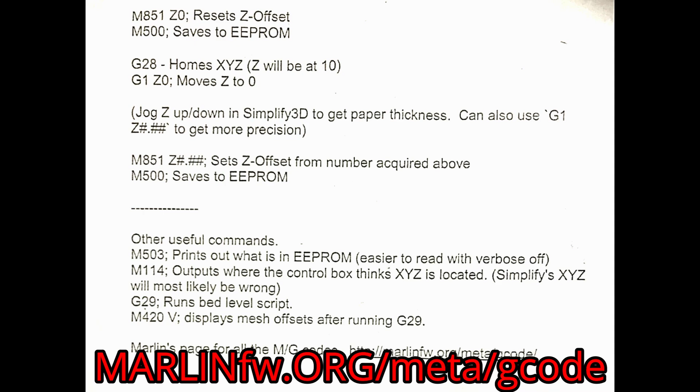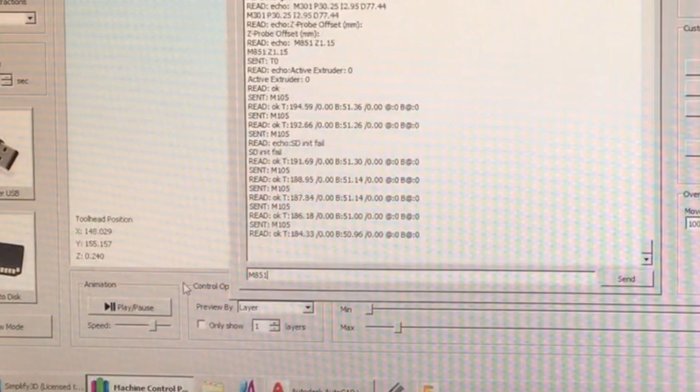We're going to start out by turning on your heaters, and we're going to reset your 0 position. And we'll do that with an M851 Z0 command. And the M500 saves that command. If you look above in the script, you'll see the script keeps changing about every second or so. I have the verbose box checked.

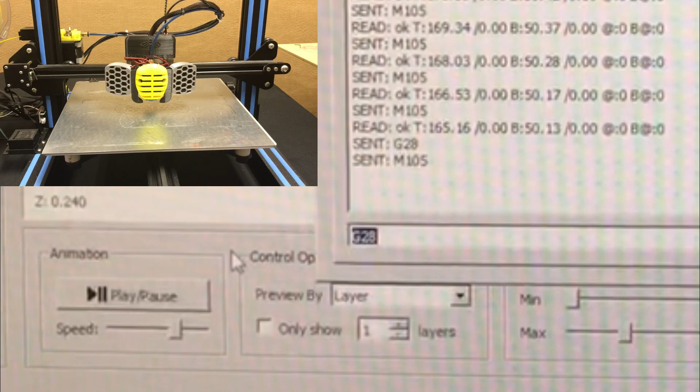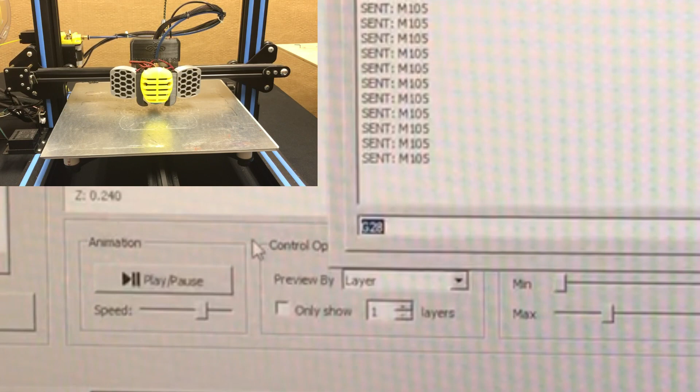We're giving it the G28. As you'll see in the picture, this is going on in real time. That is a command for your printer to home itself. The other commands, as you can see, that are sent up here, I believe that's Marlin requesting a temperature reading. So if you have that sheet and follow along, you'll understand what these G codes mean. Makes it a little bit more clear now.

A lot of guys out there have this already down. I don't want to talk down to you. This is for people trying to set their Stinger up. So kind of bear with me on this. I've only been into this for a couple of years myself and not a real G code guy.

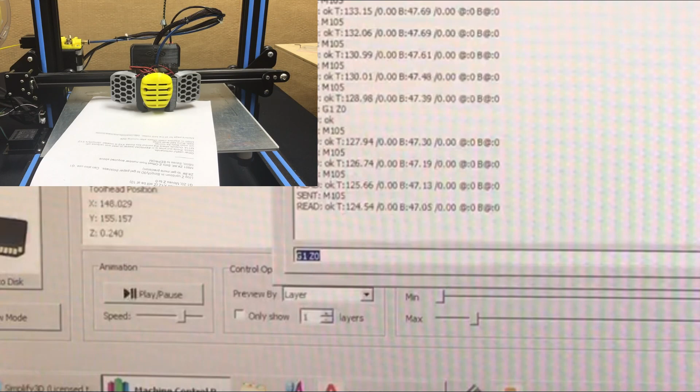We're going to use a piece of paper as a gauge, as you would. And we're giving it the G1 Z0, and that is basically taking it down to the 0 where it touched off. Now if you look above up here, you'll see my pointer right underneath the Stinger picture, and I hit that 1 millimeter up on the jog twice. So we're up 2 millimeters, which is above where the paper is gauging it.

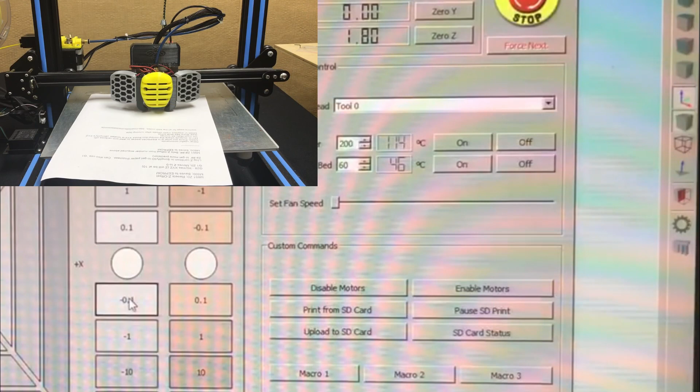Now if you look down below, you'll see I'm going down 1/10 of a millimeter at a time. I keep doing that until I feel a little tug on the paper. You see me decreasing 1/10 of a millimeter. I'm at 1.2 and 1.1 millimeters. Now I have to really tug on that paper. It seems like it's a little tight.

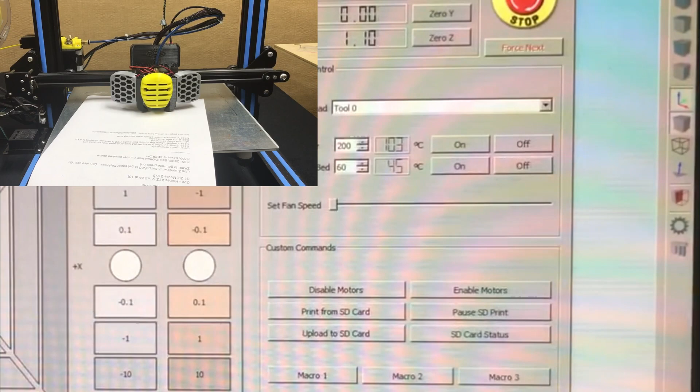So when we set our distance or our offset in here, I'm going to give it a little extra. This is a way that, if it's a little tight, you can kind of gauge it. I've done this quite a few times, so I'm doing this from experience. So I'm going to go about halfway in between. I'm going to do the M851 Z1.15. That's halfway between 1.1 and 1.2. Now you'll see me set it with M500. That sets it into the EEPROM's memory in the firmware. So now we should be all set, ready to go.

We're turning on the temperature again. I let it get away from me. Should always do this with it at least 150 degrees extruder temperature and at least 50 degrees bed temperature. So we're just going to wait. I'm doing this in real time so you get a feel for how long it takes to do this. It's a pretty simple thing.

You're tethering this to your computer. I have several machines and they're not near my computer, so it's kind of a hassle for me to take the machine into another room and tether it to that computer. Time to get a laptop.

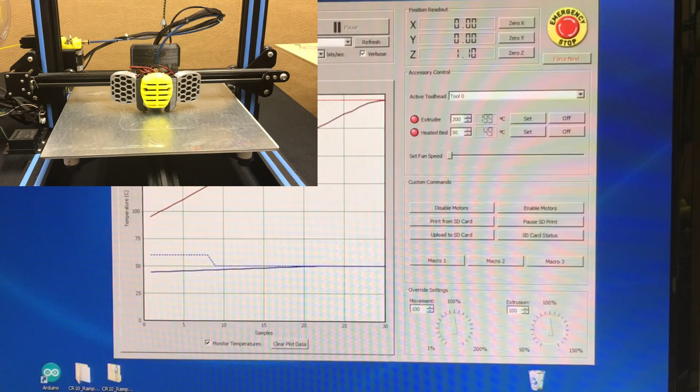You can see that heater has a nice straight graph line. Another thing to mention while we're waiting here, I'm going to do another video, or I should have one in the can soon, of the M303, which if you have your Marlin paper there, that is the PID calibration. So we're going to let this heat up, and what you'll want to see if your PID is calibrated, or your hot end, thermistor and heater, is a straight line once it gets up to its set temperature. You can also see that on your verbose feedback, on your communication screen.

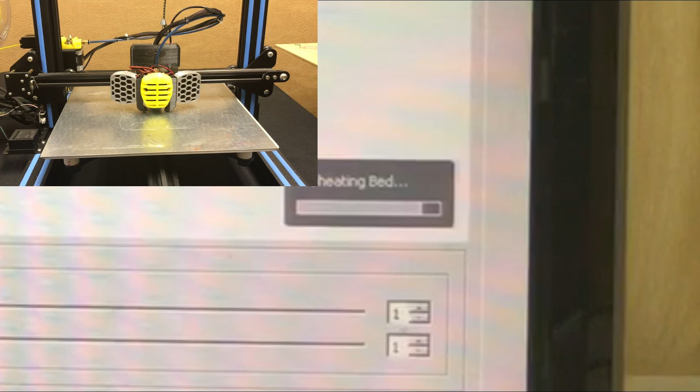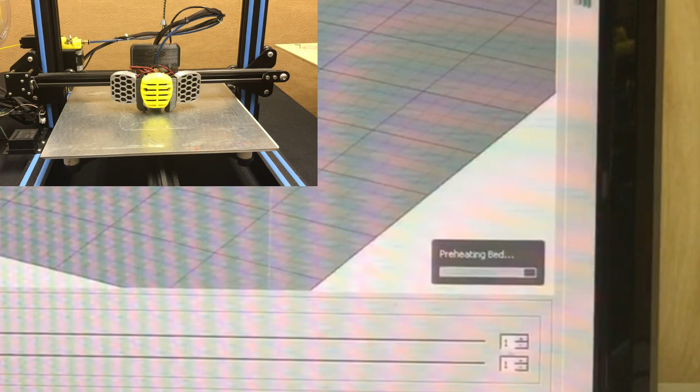We're doing this in Simplify3D, mainly because it's a slicing program, and it is also one of the best host programs you can buy. It's kind of got everything. A lot of people are using another program. Keep in mind these G codes and M codes for the Marlin firmware are the same for any one of your hosts or slicing programs. They'll all work the same. They all understand that language.

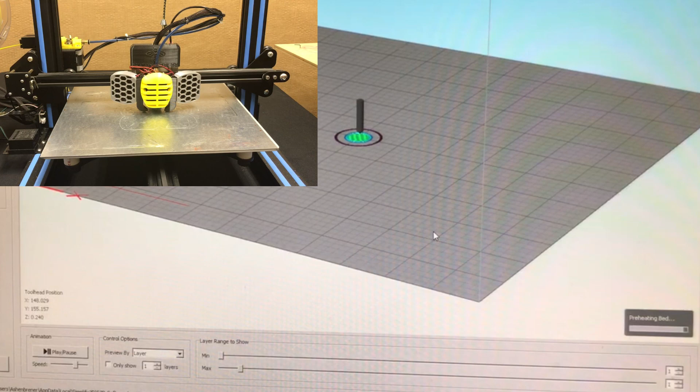What you'll see next is a shot of the communications screen. You can monitor the temperature by either watching the graph or the temperature feedback that's coming from your thermistors and feeding back into Marlin. You'll see we're just about there, 199 out of 200, 56 and change, 57 out of 60. So we're just about ready to print.

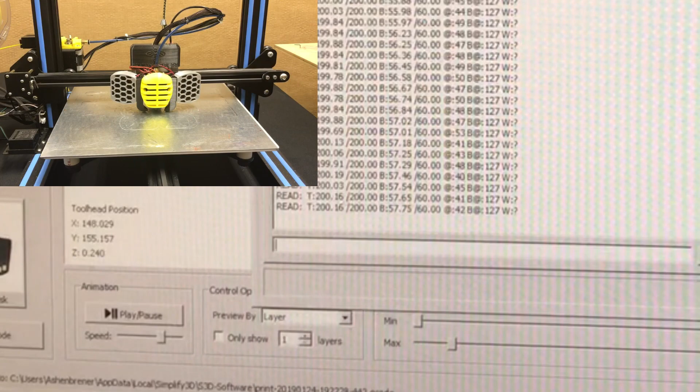And when it gets that ready signal, you'll see the screen change. It gives it the command to home and go into its, I call it a tap dance routine, where it does the bed leveling. So we're going to start out. It first has to recognize where it is. It's doing the center probe.

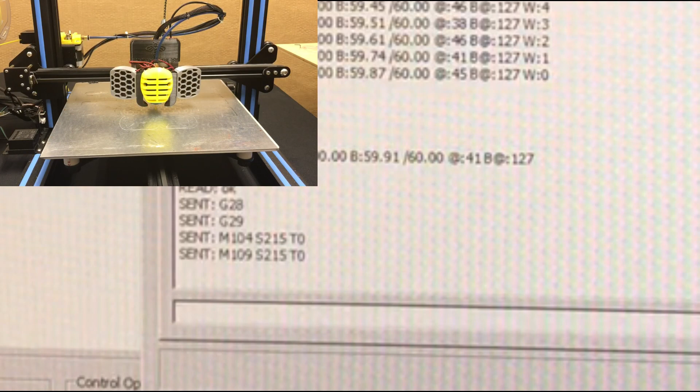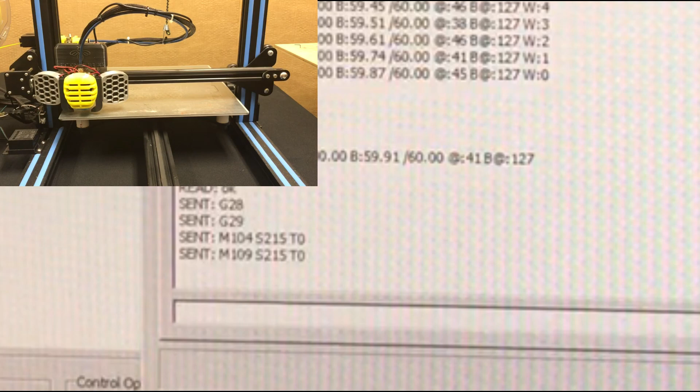It dabs twice, and we'll go to 9 locations. We have it set for 9 locations. If you have a bigger bed on your machine, you can call out when you're setting up your Marlin to do more locations. And you can set it up to do the distance from the edge of the bed. The way we have it set up, I believe 50 millimeters from the edge of each side.

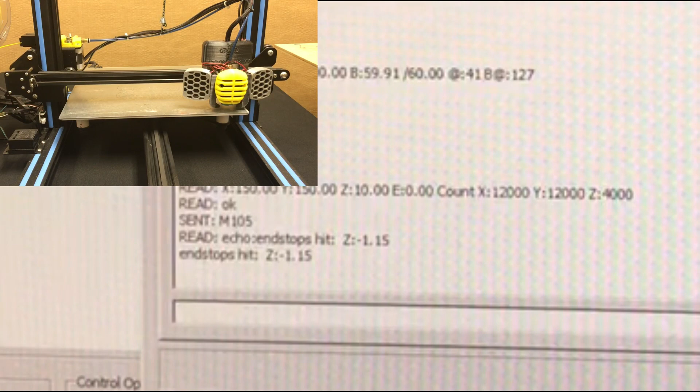And we're going to pay attention to the bottom lines on the screen. After it's done its little hits, you see that Z colon minus 1.15. That tells you the distance or the offset in here. So you can mark that down on a piece of paper, and if you ever lose your offset, you can reset it just by giving it that command, the Z command. I've done that before. I usually put a little piece of masking tape, or I take a felt tip marker and put it right on the bed in the corner and take it off with acetone.

You also probably want to mention this. You want to just check before it goes into its tap dance. Make sure there isn't a little plastic booger on the tip. Your tip is now actually sensing where it's going to be printing on the bed.

Also, good to mention, make sure all of your wheels are tight, your machine is in tune. This is real important if you don't have a belt that keeps the Z motors from drifting between each other. You want to measure that beam across there. Make sure it's within a millimeter or 2 of the bed. There is a limit to how much that processor can hold, the difference in the heights. So regardless of what your bed leveling system is, it will go out of range. So you want to make sure of that bar across there.

I've got a couple really good videos. If you look through my videos, I've got some maintenance videos. I did one called Truing the X Beam, and that's real important. Make sure all your wheels are tight. I have one called Eccentric, explaining eccentric bushings. Make sure all your eccentric bushings on all your wheels are tight or within tolerance.

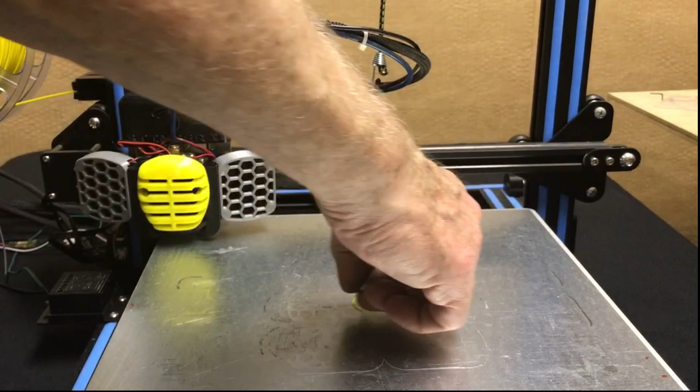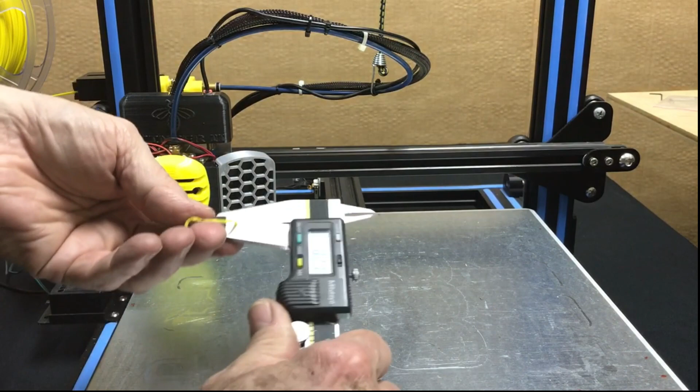Okay, so we're going to do a measurement now. This is real important to see where you ended up. Just pop it up with the edge of the razor blade. Let it cool off just for a second. I'll actually use my digital calipers here. We're looking for 0.2 on here. There's a couple spots on here, one where it goes in and out, it's a little thicker, and right next to that where it's a little thinner when it starts. So there's where it went in and out, the 0.16. Everything else should be about 0.2.

And that's about perfect. That's about as close as you can get it. That'll put down a perfect print. Now that's all relative to the way you've got your first layer set in your slicer. So mine's set at that. Yours may vary. Just check your slicer at your layer height.